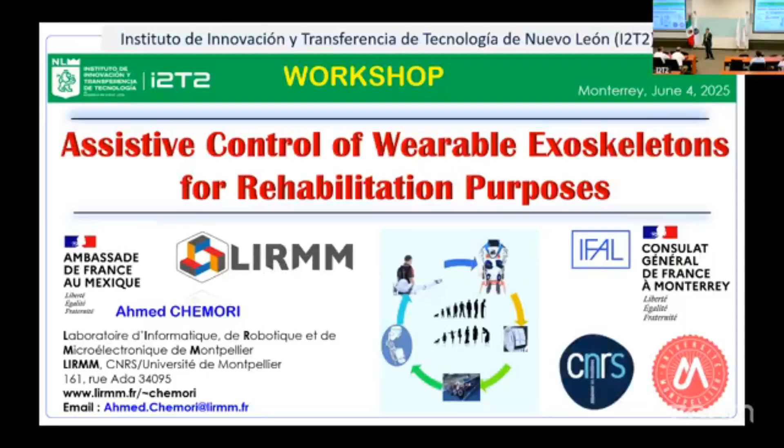First of all, before I start talking about the topic itself, let me introduce my institution. As they said, I am coming from Montpellier. Here, as you can see, this is the map of France. Montpellier is a city situated in the south of France. Very nice city, as you can see from the pictures. Here it is the center of Montpellier. And Montpellier is known by 12 things.

I will just mention 2 or 3 things. First of all, according to the statistics, we have more than 300 sunny days during each year. We have very nice beaches. It's the 8th biggest city in France with more than 300,000 people. And at our University of Montpellier, we have more than 70,000 students.

And Montpellier also, it's known by something else. We are talking about health and so on. So just to know that the first, or the oldest, faculty of medicine situated in Europe, and maybe in the world, is situated in Montpellier. It was founded around 1220. So we have a strong field in medical robotics, medical staff in Montpellier, with strong hospitals and institutions also.

I am working in a research lab called LIRMM, and LIRMM, as you can see here, this is the abbreviation, coming from Laboratory of Informatics, Robotics, and Microelectronics of Montpellier, situated in the north of the city. We have 2 buildings.

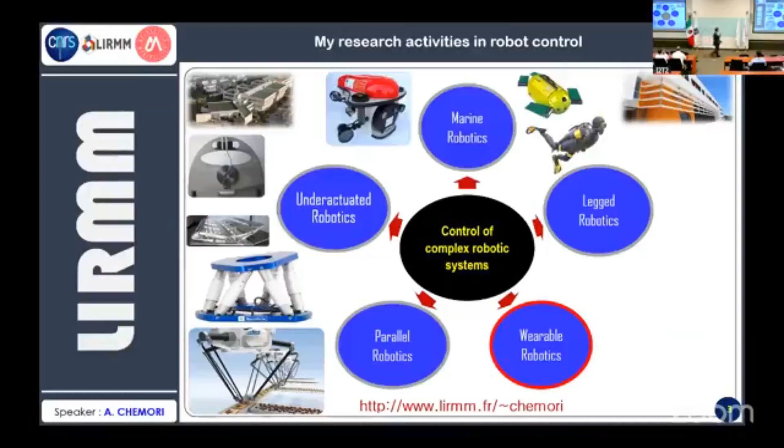The third topic concerns marine robotics, where I'm mainly interested in two kinds of underwater vehicles: classical propeller-actuated vehicles, and bio-inspired underwater vehicles. As you can see, one example is a robot actuated with fins instead of classical propellers, and we've done a lot of work on cooperation between the robot and a human diver. So that's the third one.

The fourth application concerns control of walking robots. For walking robots, I worked a lot on humanoid robots, like walking gait control. Recently I started a cooperation with Estonia, working on control of these robots in extreme conditions, such as walking outside in mud. And the last topic is the topic of today's presentation.

Then I'll show you a brief historical overview. Development of this kind of system started a very long time ago, and I'll give some examples of exoskeletons today, including some that have been commercialized in recent years.

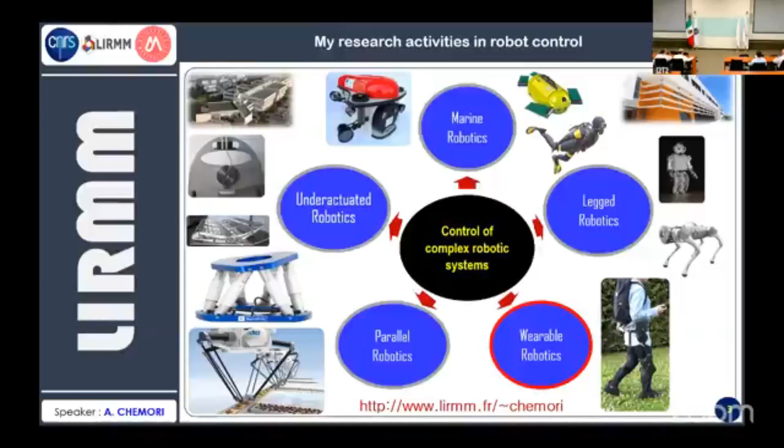For paraplegics who have experienced profound spinal cord injuries or other neurological disorders, wheelchairs may have been the best means of mobility. Now, researchers are focusing on exoskeletons, robotic ambulation devices, as a therapeutic intervention that may help some paraplegics get on their feet again.

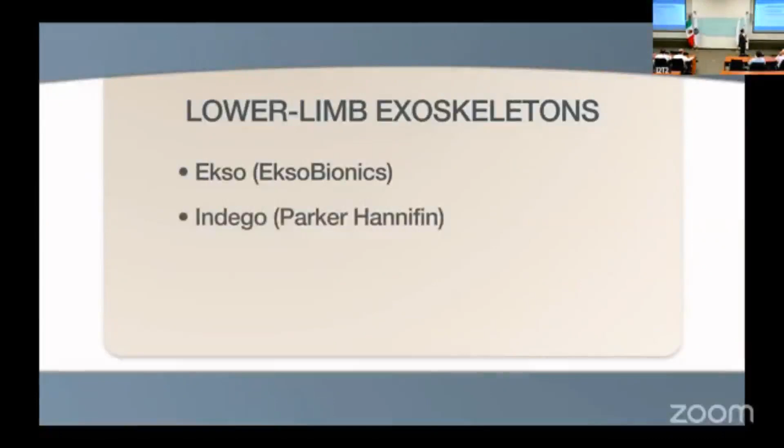Let's take a look at some of the options currently being developed. Four types of lower limb exoskeleton devices are currently being used in research and clinical trials, including the Ekso by Ekso Bionics, Indego by Parker Hannifin, Rewalk by Argo Medical, and Rex by Rex Bionics.

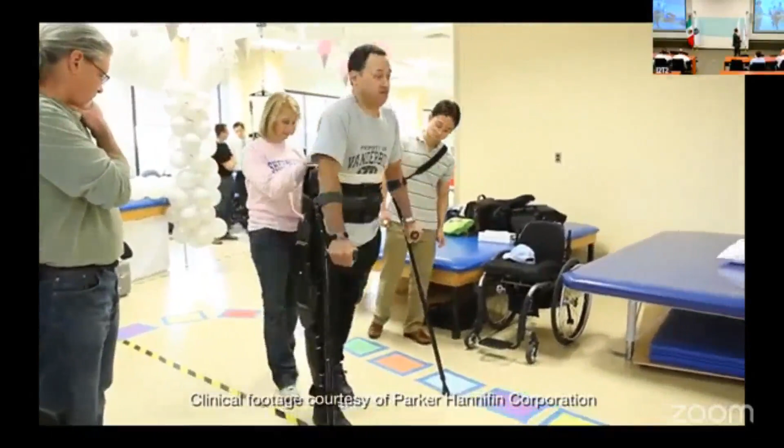These devices offer upright mobility to injured people who are unable to walk or who can walk only for limited distances. Early research suggests that these devices can contribute to reducing medical complications and improving physical strength and emotional wellness. In the meantime, it's critical for paraplegics to pursue habits that may allow them to qualify to use these devices, including maintaining a healthy weight.

While clinical trials continue, exoskeleton manufacturers are pursuing approval for private purchase of these devices in the United States.

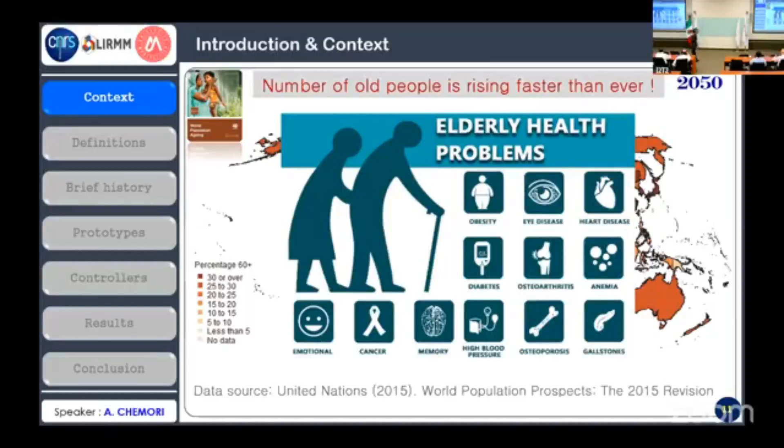And the question we can ask concerning our research topic is: what will be the solution for their mobility problems? How can we help those people in terms of mobility? Pay attention, maybe you cannot realize at what level these persons need help.

I'll give you a very simple task. If you have a human in a wheelchair, in a chair like that, and you move from seat to stand, from sitting position to standing, for us it's very easy. We don't even think about it, it's very easy.

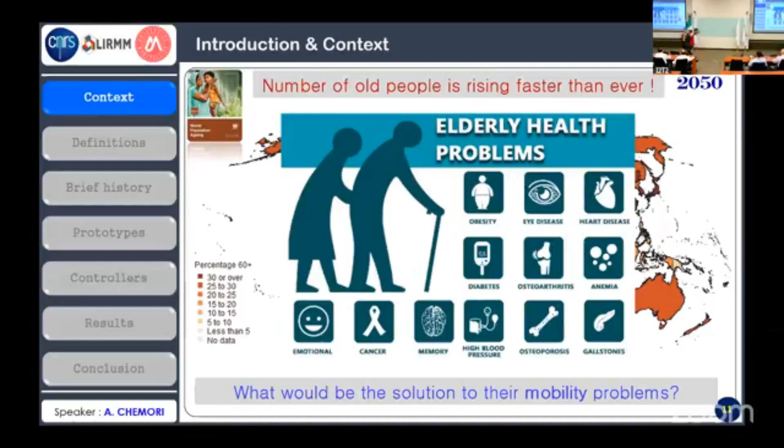But for an elderly person, this may become a challenge. Just doing this motion from seat to stand becomes really a challenge. They cannot do it, because of the weakness of the muscles in the legs. So this is a big issue.

In this case, exoskeletons may be a solution. This is why I'm talking about this topic today. Here you can see an illustration of this sit-to-stand task using an exoskeleton that can be used to help humans do this task.

Before going further and talking about my research and activities, let's go back to the basics. I don't know if everyone here is specialized in exoskeletons, but let's cover some basic definitions. The first thing to know: what is an exoskeleton? Because an exoskeleton is a robotic system used by the human, and so on. So where does this definition of an exoskeleton come from?

Before introducing the term exoskeleton, let's talk about something else. If you look at humans and animals, what we have inside our body is not an exoskeleton, it's an endoskeleton. The endoskeleton is here to protect the body and support its inner workings. We have muscles attached to the skeleton, and using the muscles you can move the different limbs of the body and do the tasks of daily life.

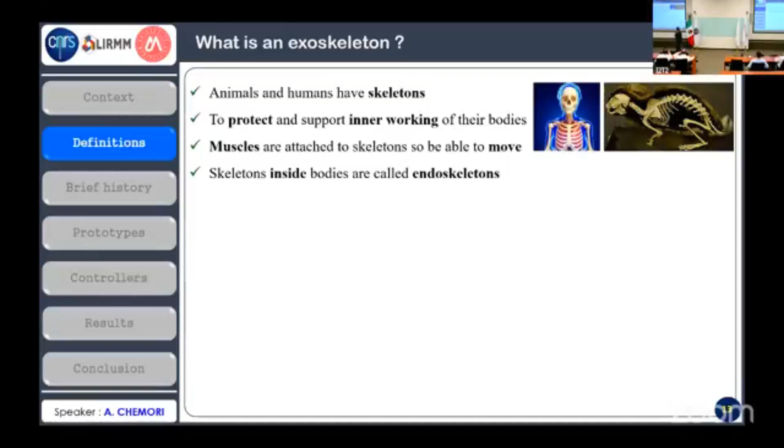Now, if we look at animals, we have something else. Animals like insects, spiders, shrimps, crabs, and so on, do not have an endoskeleton. They have something outside the body, and we call it an exoskeleton. It's used to protect their body, for instance from predators, and so on.

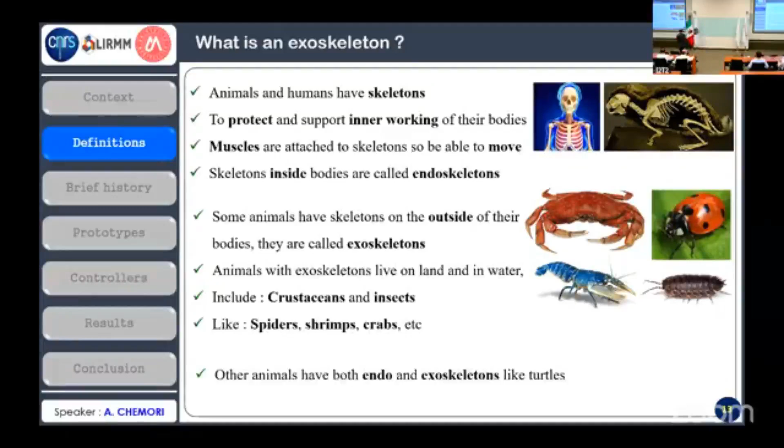And we have the exception: one animal that has both endo and exoskeleton. What do you think? Which animal can have both of them, endo and exoskeleton? Just one animal... Yes, exactly. The turtle has, as you can see, both endo and exoskeleton. So these are just basic definitions to start.

Now let's talk about an exoskeleton in terms of technological definition. So what is an exoskeleton? An exoskeleton is first a mechanical frame, designed to be worn by the human. So the human will wear the exoskeleton for a purpose. Why should the human wear the exoskeleton? It is designed around the function and shape of the human body.

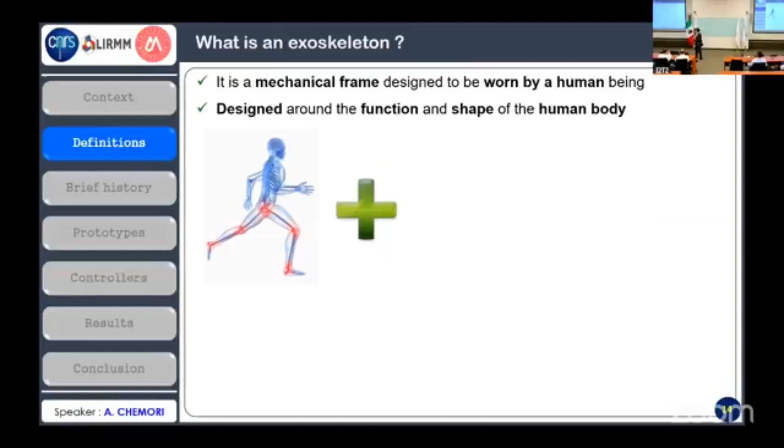Here, as you can see, you have the human body, then an exoskeleton designed to be worn by the human, and the result will be like that: a human wearing an exoskeleton. So this is the second thing to know.

Now, when the human moves, he will move with the exoskeleton. So the exoskeleton should move with the wearer, adding strength and durability. This is one of the purposes of developing exoskeletons, and this additional strength and protection benefits people in dangerous situations, like for workers in hazardous environments, or it can be used for mobility issues.

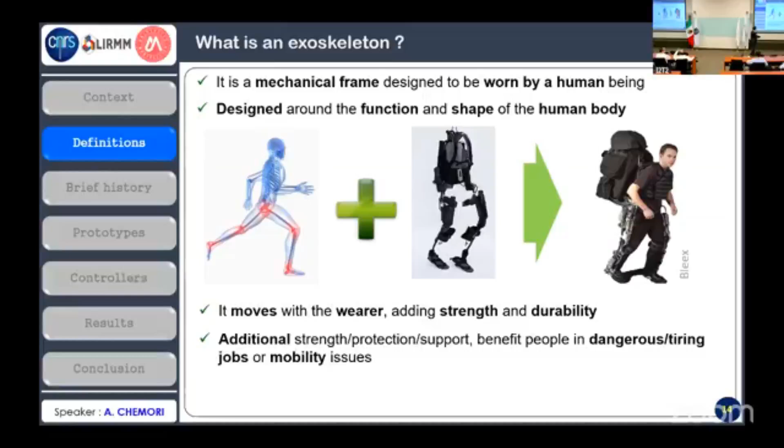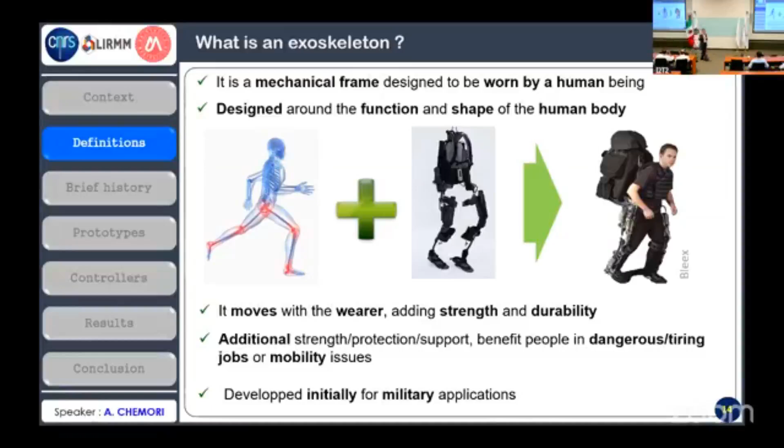So we can use exoskeletons to restore a mobility that a person does not have due to disability, for instance, or an accident or something like that. We have to say that exoskeletons have been developed initially for military applications, but nowadays we have much more civilian applications where we are using exoskeletons.

Now let's talk about the four applications, starting with the first: medical applications. If we analyze the case of disabled people, we have different types of paralysis depending on the limbs that are lost.

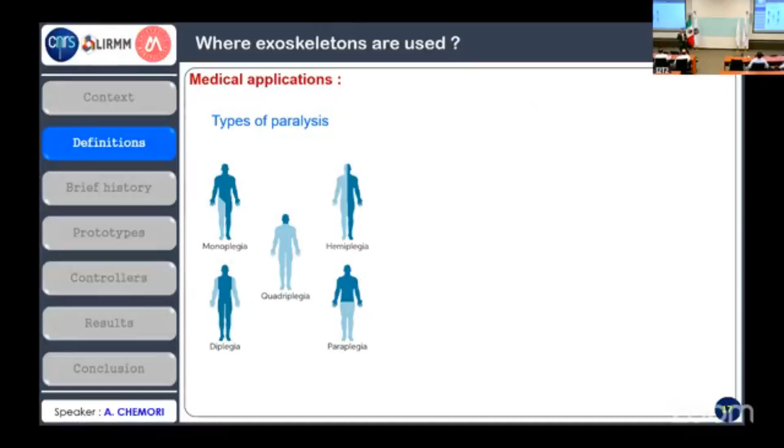It can be monoplegia, where you lose just one limb. Hemiplegia is two limbs, like lower and upper, on the right or left side. Diplegia is the two upper limbs. Paraplegia is the two lower limbs. And the most difficult one is quadriplegia or tetraplegia, where all four limbs are not working.

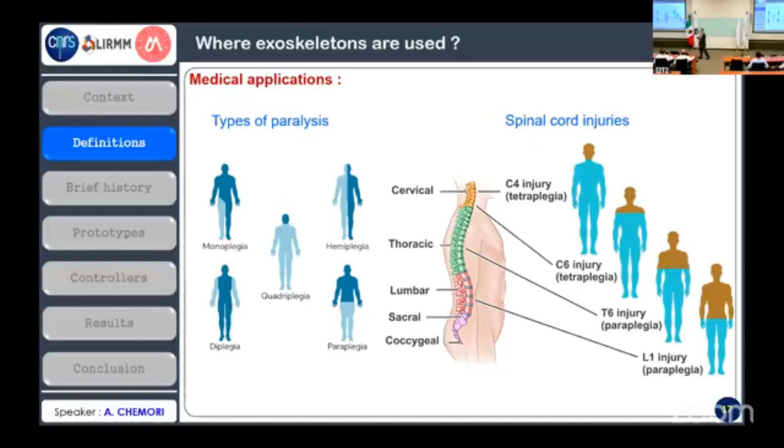This is the consequence of what we call spinal cord injury, and as you can see, it depends on where the injury happens and the resulting consequence. If it happens in the thoracic part, the consequence will be like paraplegia, for instance. This is just an illustration to show that these people need help, and exoskeletons can be used for this kind of application.

In general, for medical applications, these exoskeletons can be considered assistive devices in physical therapy. This is the main application where exoskeletons are employed, specifically for rehabilitation, and we do rehabilitation to amplify the muscles. I will explain how we can amplify the muscles using an exoskeleton.

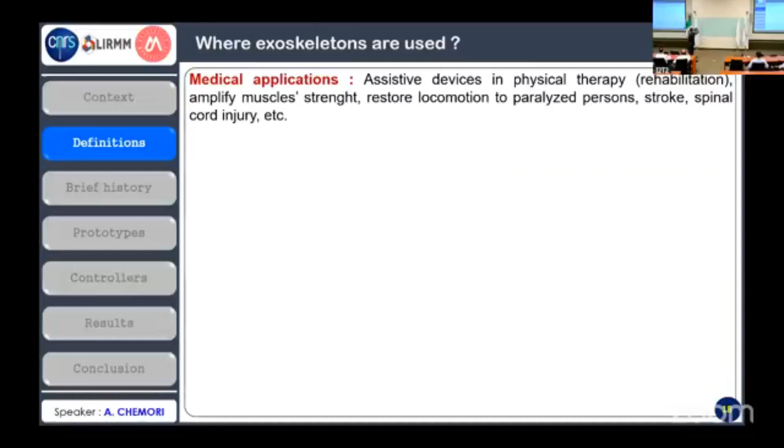They can be used to restore locomotion. So if the mobility of one limb of the body is lost, we want to restore this locomotion for disabled people, and we can use exoskeletons for different therapies like stroke, spinal cord injury, and so on.

Here we have some illustrations. We can have exoskeletons for upper limbs like here, lower limbs, something for training as you can see in this example, and sometimes for specific parts of the body, as you can see here, exoskeletons for the fingers of the hand. So this is for medical application.

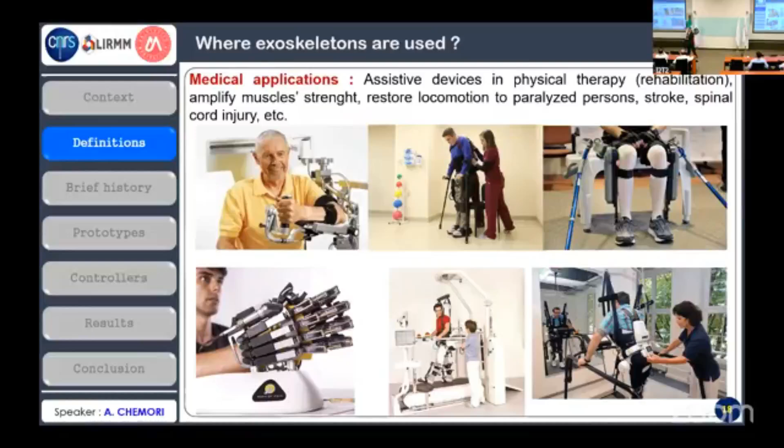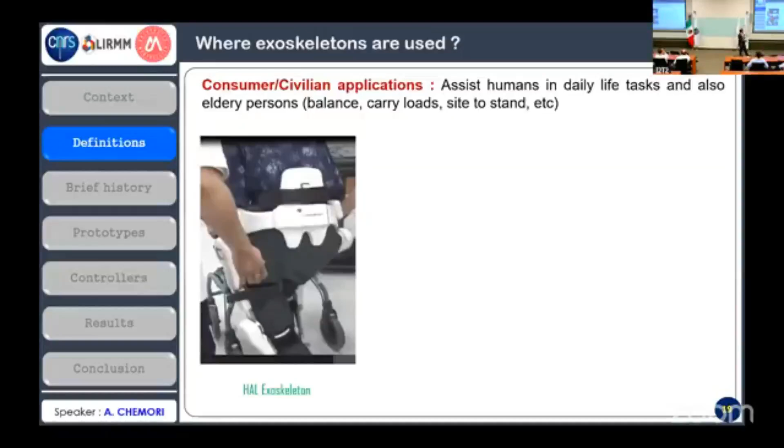Now, exoskeletons can also be good for civilian applications, and they are commercialized. Mainly for this application, they are used to assist humans in daily life tasks. As I told you, sit-to-stand for elderly persons can be very challenging for them, so exoskeletons can help them in daily life tasks and also help with balance, like carrying loads, as shown here - an exoskeleton can help the human carry these loads.

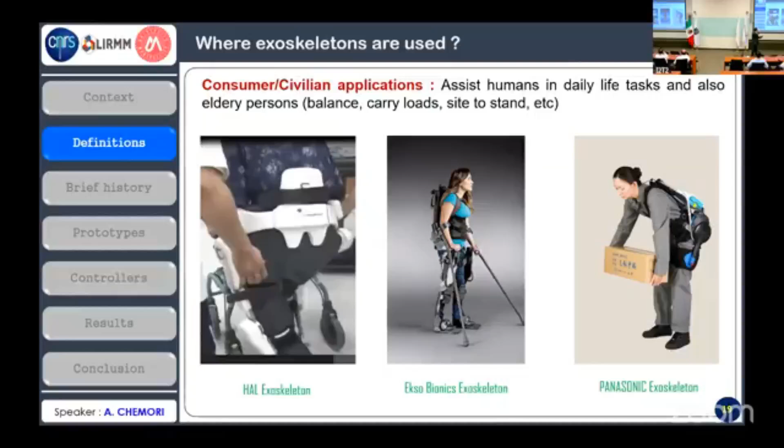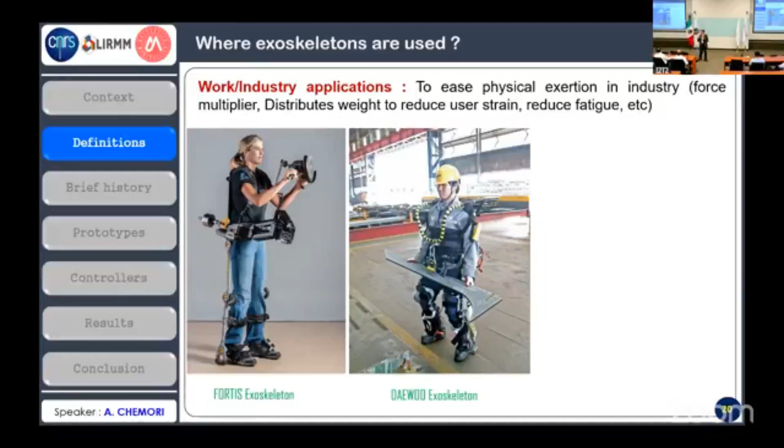Imagine a woman working with a tool that weighs 10 kilograms, and she uses the tool for 8 hours per day. This is a very big problem. So an exoskeleton can be used to hold the weight of the tool, such that the human can manipulate the tool very easily. We have other examples, as you can see here.

Here's another example, like for car manufacturers. Sometimes you don't carry a heavy tool, but you are in a very bad position all day, like that. This is not very good for the body - staying like that for 8 hours is not good. Exoskeletons may be used as a solution in this context, for instance.

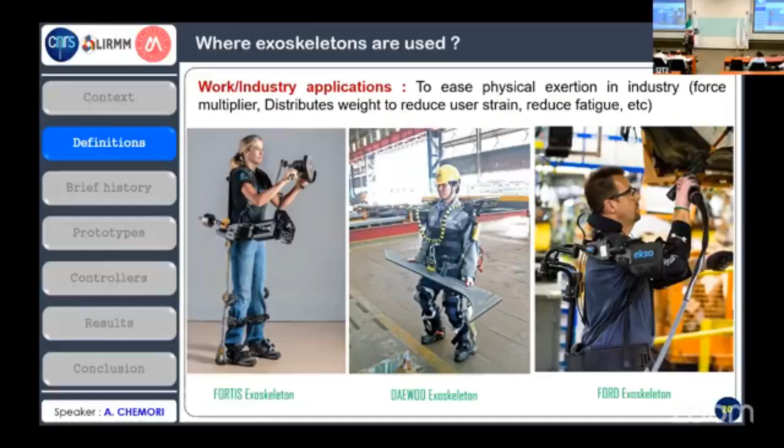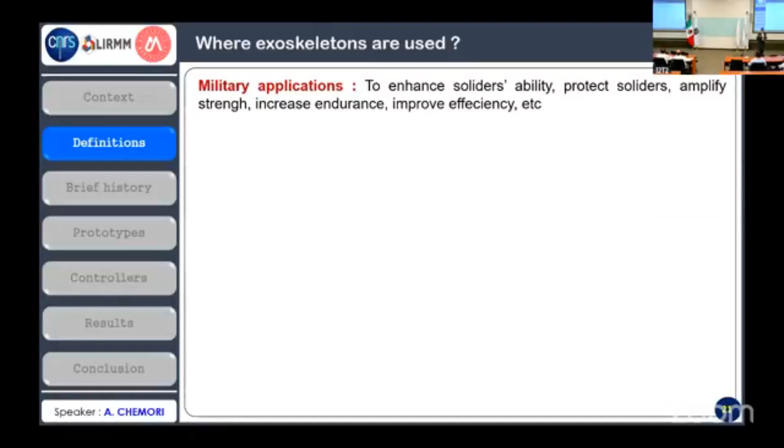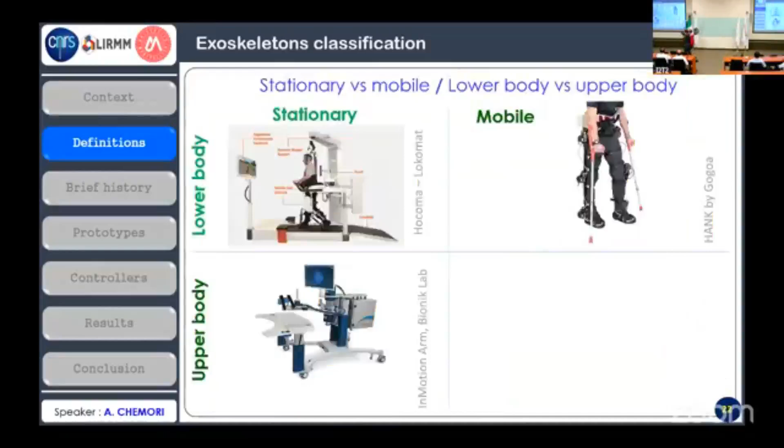Now let's do a better classification of exoskeletons. Let's give you more elements, because the previous classification is very easy - like if it is upper or lower body, and if it is static or moving.

The second thing is the structure of the exoskeleton itself. It can be a rigid exoskeleton, but nowadays we have a tendency toward another kind of exoskeleton - they are called soft exoskeletons. So they are not rigid, they are soft, and they are more and more developed in many institutions all over the world.

The second criteria is the action, because for sure we can have exoskeletons actuated with motors - they are called active exoskeletons - but we also have passive exoskeletons, so they are worn by the human, but they are not actuated.

The next criterion is the power technology, how the exoskeleton is actuated, which kind of motors or actuators are used. It can be an electric actuator motor, a hydraulic actuator, a pneumatic actuator, it can be hybrid, a mechanical system, or others. So this is the actuation of the system itself.

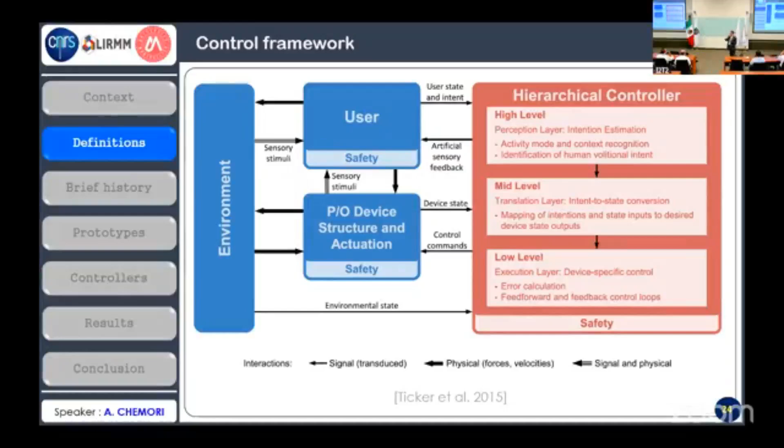I have to mention something very important here, which is different from any classical robotic system. Look here: you see the user, the exoskeleton, and the controller. Pay attention to this word: safety, safety, safety—a lot of safety. Everywhere we have to take care about safety because, as I told you, don't forget that you have a human inside the exoskeleton. So you have to pay attention.

Now let's go to the history. I like, when I do presentations, most of the time to give the history, just to know the origin of developing things. Let's start talking about the origin of exoskeletons. It's not very new—for sure they have been developed a lot in recent years, but the idea of using an exoskeleton is very old, going back to like 1890.

Then in 1965, another exoskeleton, a huge one. It weighs 680 kilograms—please keep in mind this value—and it has 30 degrees of freedom. So it's very strong, a full body hydraulically actuated exoskeleton that drastically amplifies human force.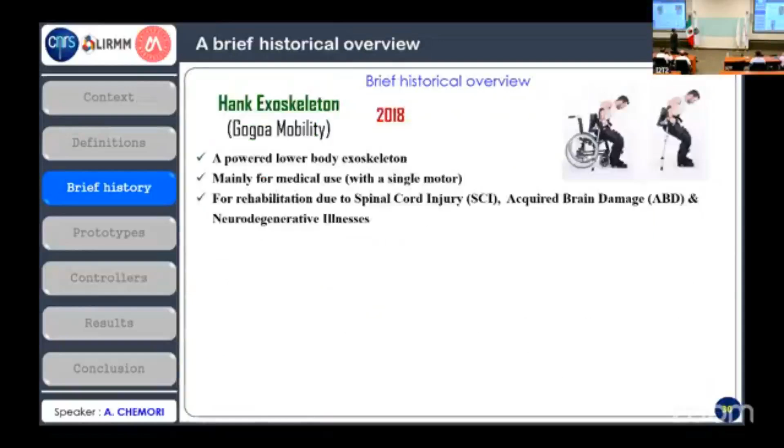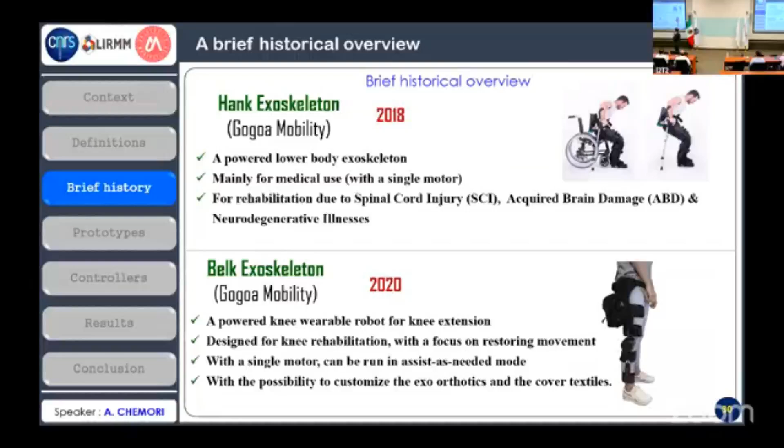2018, another exoskeleton developed in Spain by this company. As you can see, it's used also for walking, the same as the previous exoskeletons. They developed another version in 2020, and as you can see in the illustration, it's a powered knee wearable robot for knee extension, activated with a single motor. We have just one motor to activate this degree of freedom in the knee.

Now, some examples of exoskeletons of today. A lot of development we have seen, and we have a lot of examples. As I told you, exoskeleton development started in military applications and in research labs, in universities, in companies. But now we can see some exoskeletons commercialized. You can buy them. For sure, the price is still high, but we can buy exoskeletons.

We have Lokomat, used like for children rehabilitation, for training or walking, for gait training. And HAL, as I presented before, can be used for daily life tasks, like carrying heavy payloads.

The next one is for industrial applications. As I told you, might be an industrial worker working in a company doing something in this position all day. So an exoskeleton like that can be used, and it's very beneficial. It's called walking assist, or it can be used also for walking tasks.

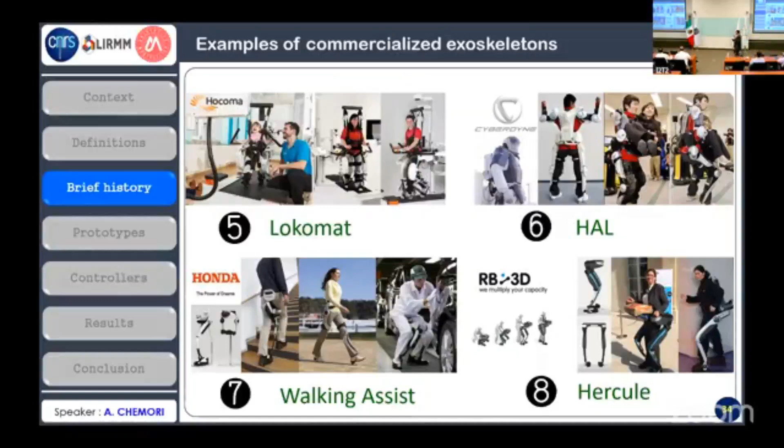After this presentation of the history, what has been done, the beginning of exoskeletons, and the exoskeletons of today, let me talk about our research. Actually, I'm working in cooperation with a university in Paris, and at that university they have exoskeletons. One of the exoskeletons we started working on was this one.

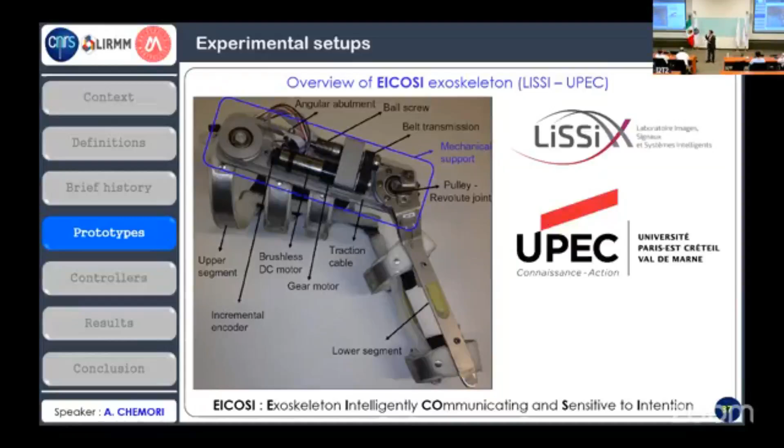As you can see, the exoskeleton itself is not very difficult. The structure is very easy because we are talking about rehabilitation of just one degree of freedom of the leg, the knee. It is developed at this research laboratory called LISSI at UPEC University in Paris, mainly developed for knee rehabilitation. The purpose of this exoskeleton is knee rehabilitation.

Now, if you want to control this exoskeleton, first you need to compute the dynamic model of the exoskeleton and the wearer. Computing the dynamic model is easy because it's just one degree of freedom, but it's difficult because, for instance, when you take into account the leg of the human, we cannot know it perfectly since it depends on the user. Sometimes you have a user with 70 kilograms of weight, or another with 45 kilograms, so they do not have the same leg, weight, inertia, and so on.

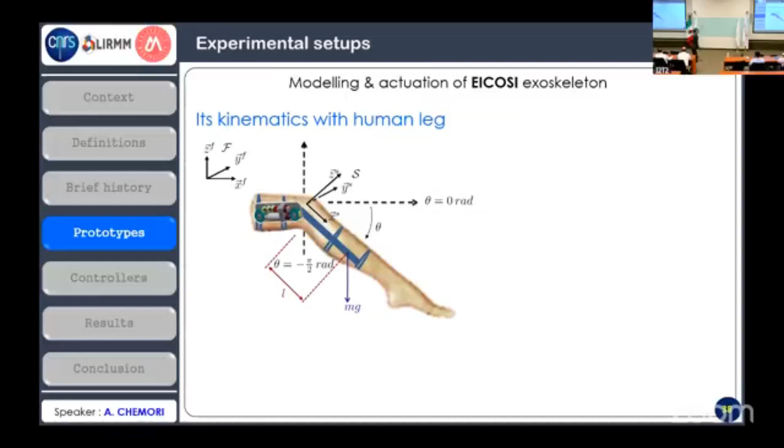So the dynamic itself is not very complex, it can be written like that. It's just one scalar differential equation. However, the big problem is knowing the different parameters of the system, including the exoskeleton and the wearer - the human and the exoskeleton together - and how we can identify those parameters.

And the other issue is this term, as you can see here, it's the torque developed by the human. The human will develop the torque. Imagine an elderly person who will use this exoskeleton - how can you measure or estimate the torque developed by the human? It's not possible. This is a big issue.

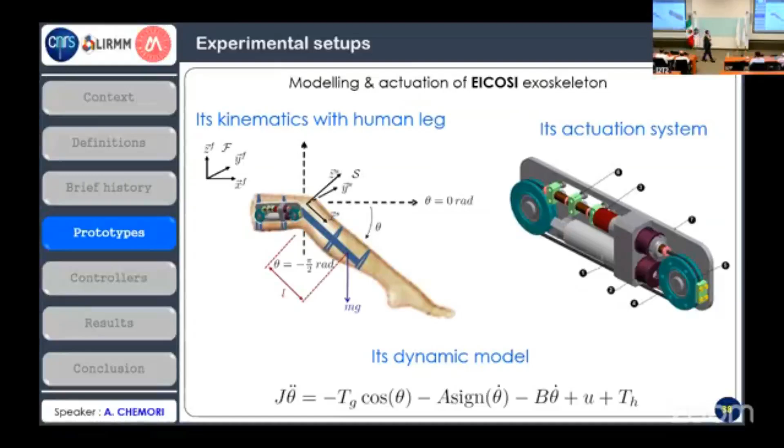Its actuation system, as you can see, it's a system with a cable, and two pulleys here, the motor is here, and it transforms the rotation of this motor to a rotation along this axis of the knee. It's mainly used for knee rehabilitation. This is just the hardware of the exoskeleton itself. We have here the control system, the power stage, the actuators and sensors used, the signal conditioning system, and this is mastered by this control system.

Another application is for rehabilitation. Imagine you have a human and you want to do rehabilitation of the leg, a flexion extension of the knee, and you repeat this motion. To repeat it, you need to wear the exoskeleton, have the human in this sitting position, and control the motion of the exoskeleton for this repetitive flexion extension motion.

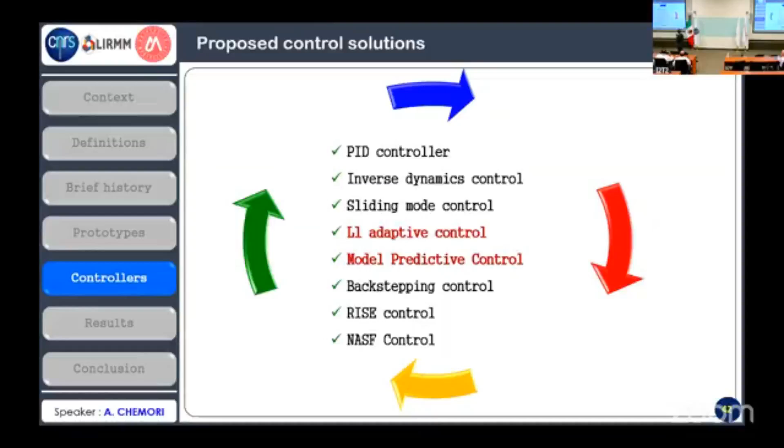Now, proposed control solutions, what we developed as controllers for this case. We developed different controllers. Here is the summary. I won't have time to detail all of them, but I'll try to detail two: the first is an L1 adaptive control, and the second is a model predictive control. Both have been validated in different situations of rehabilitation tasks.

Now let me talk about what we did as rehabilitation. We have been interested in three kinds: the first is passive rehabilitation, the second is assistive rehabilitation, and the third is assistance as needed. Let me explain all three. First, don't forget this exoskeleton has been developed for knee rehabilitation.

Let's talk about passive rehabilitation. Let me give you a complete example. Imagine a person who had an accident in football, for instance, and didn't move his leg for two months because he couldn't. What will be the consequence? After two months, what happens in the leg, and especially in the muscles?

He will lose the muscles. They will be very weak because the muscles are there to move the different parts of the leg. If you stop that, I remember a student, years ago, who didn't move his arm for maybe two months and lost the muscles of the arm. This is a big problem. So you lose muscles, and now you have to restore them.

How can you restore them? You cannot ask a human to, from the beginning, do something hard. You will destroy the muscles. What you have to do is start with something soft, something easy. So we do what we call passive rehabilitation.

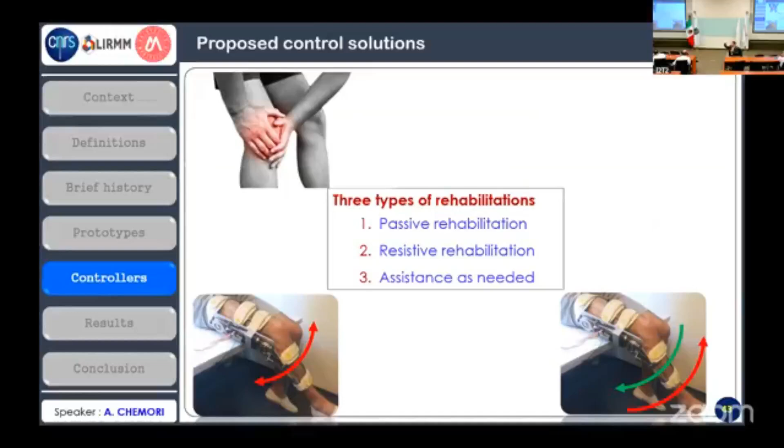The problem here is to detect the intention of the human, first, and second, to complete the torque developed by the human to reach 20 Newton meters to do this motion. This is what we call assistance as needed, and here you have an illustration of this task.

What is an L1 adaptive control? L1 adaptive control is a recently developed controller for certain purposes, compared to classical adaptive control. I will explain the reasons. We published this paper, and we developed this controller for flexion extension of the knee, as an application for knee rehabilitation, with the human in a sitting position like that.

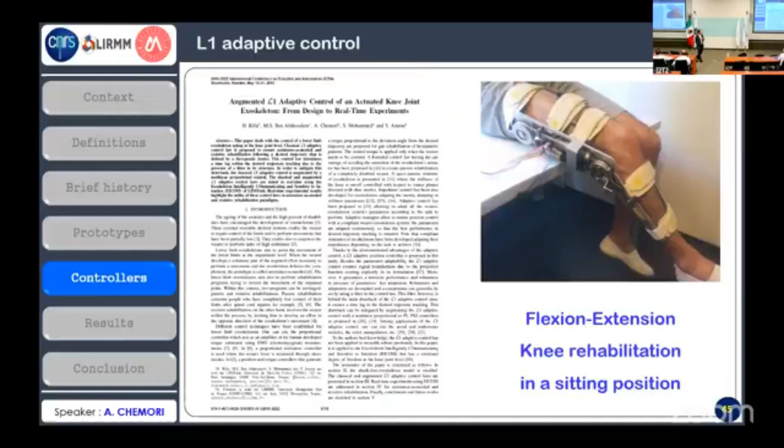Let me tell you more about L1 adaptive control. This is more theoretical—I will try to go quickly, but I will also try to explain the concept, because the concept itself is good to understand. Why L1 adaptive control? I think everyone here knows what L1 is, and what adaptive control is in general.

You know PID control—it has three gains. I don't know if you can write. Is this a table? Can we write on it? No. What? I don't know.

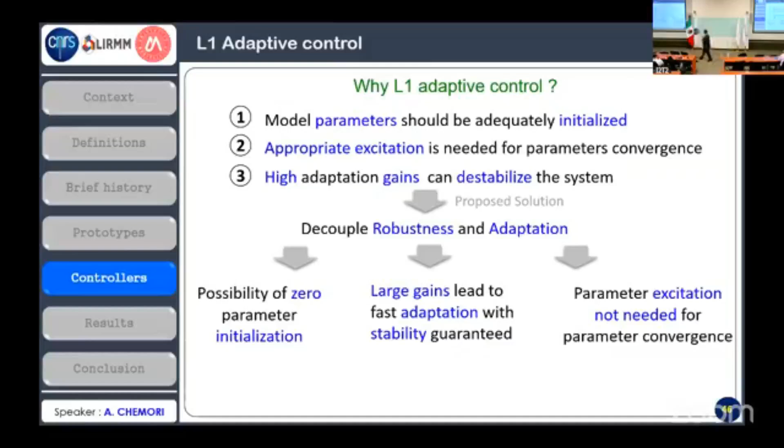All these aspects we can find in the concept of L1 adaptive control, developed around 2010, and briefly, the concept was applied a lot for aerial systems, aerospace.

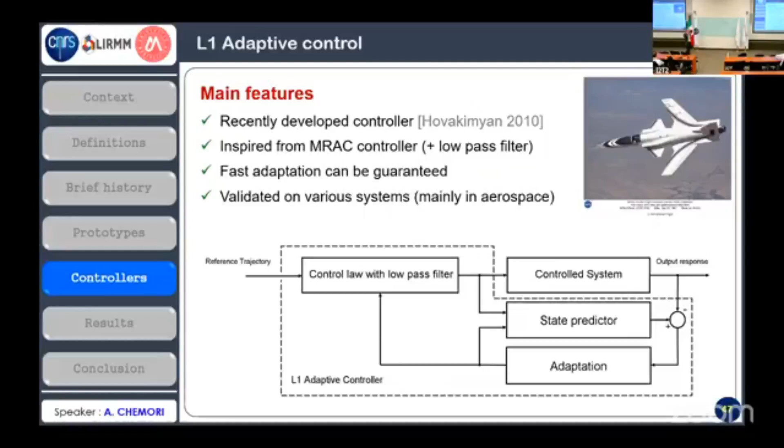And the concept is here: we have the controlled system, we have the state predictor, we have the adaptation mechanism, and the key development part of the controller is a low pass filter. When you introduce this low pass filter, you can increase the gain, no problem, you will not have instability.

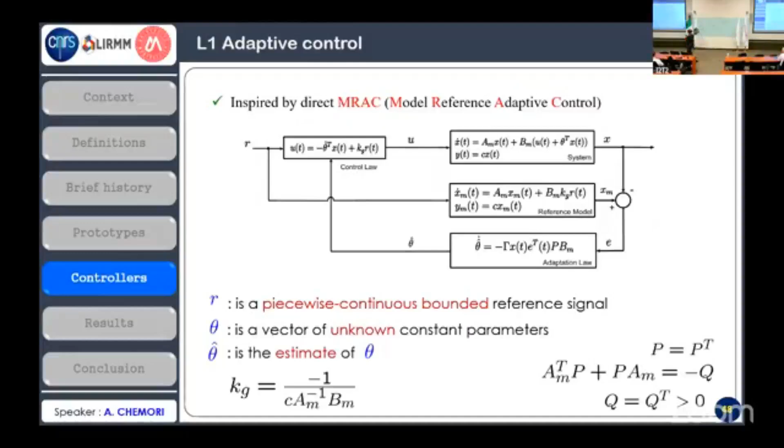Basic principle going from model reference adaptive control to L1 adaptive control: first stage, you have to replace the reference model. Here, reference model, you have to replace it by a state predictor. Second stage is to add this low pass filter, as you can see here, to filter the control input. And the last stage is to limit the estimated parameters.

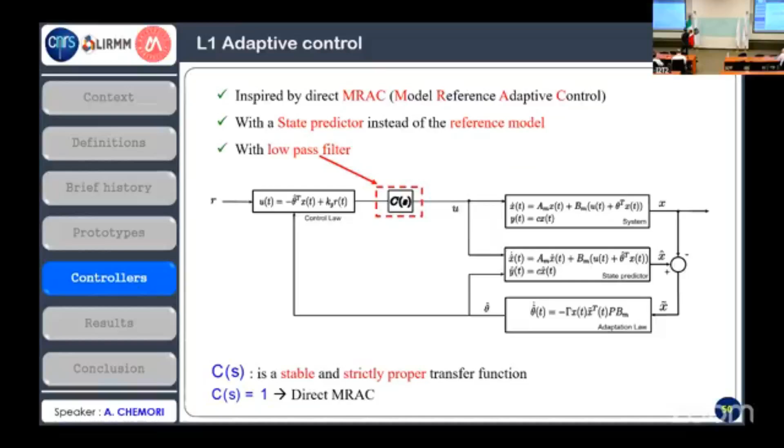Because when you estimate, how can you guarantee that the estimation will not go to infinity? So you need to guarantee the boundedness of the estimated parameters, and in this case you just add this projection, added in the control system here. Yes, here you have projection to limit the estimated parameters. This is the same block diagram for multi-variable, multi-input, multi-output systems.

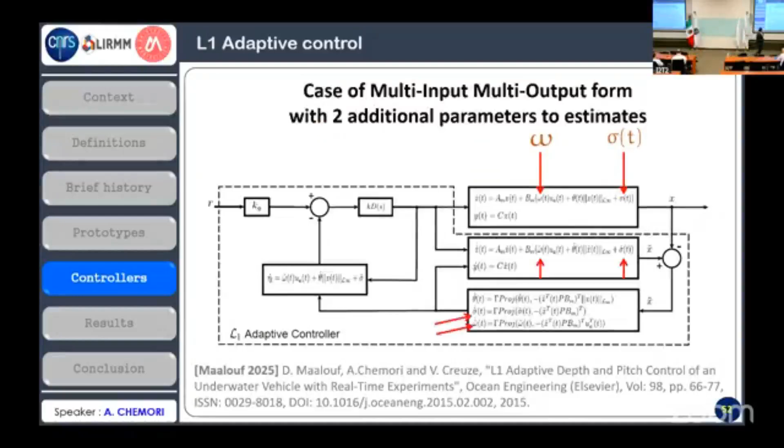Here we have a small problem with L1 adaptive control. Since you have a filter, and also the same for model reference adaptive control, if you have a fixed reference like that, you can converge perfectly. But if you have a time-varying reference, you will have a problem of time lag limitation. This is a limitation for L1 adaptive control and also for model reference adaptive control.

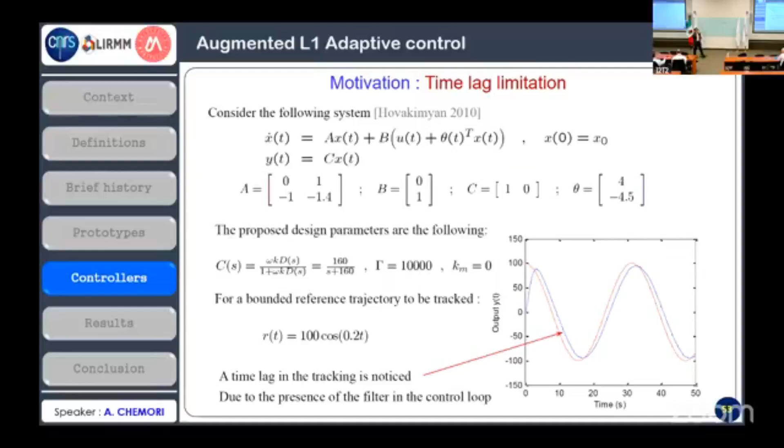So the solution we propose is just to add an external control loop based on a PID, for instance, and you combine this with the L1 adaptive controller to resolve this problem. And the result will be here, as you can see.

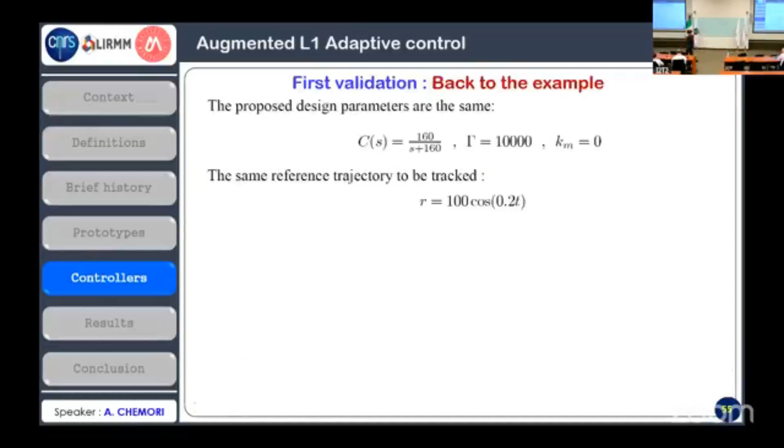If we go back to the example, this is the result. As you can see, the red curve is the desired, the blue is the previous case for the L1 adaptive control, and the gray one is the proposed controller - an extended L1 adaptive controller - and we reduce this problem of time lag that we have in the system.

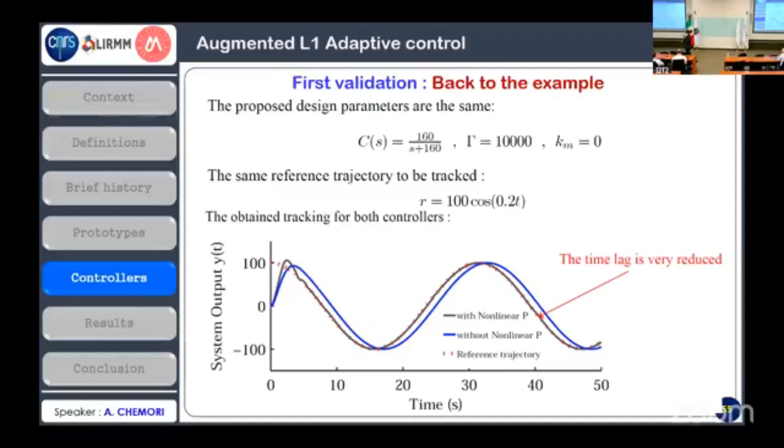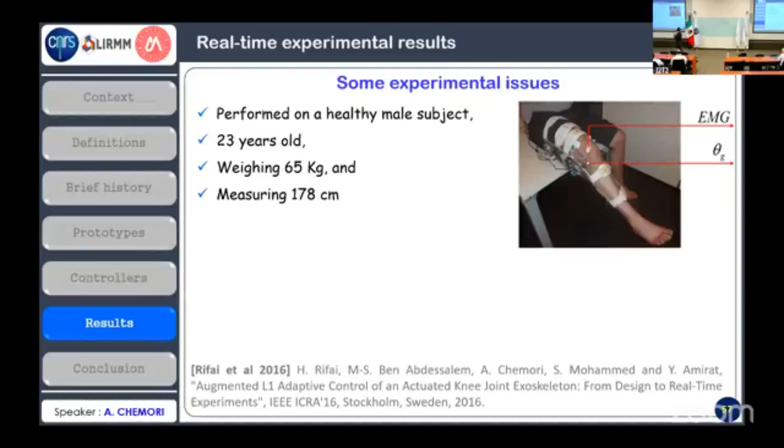Now, experimental results. We implemented this controller on our exoskeleton, and let me show you some experimental results. We did experimental results on a healthy person, 65 kilograms weight, 1 meter 78 centimeters, and we did different scenarios. We employ EMG signals to measure the activity of the muscles of the leg of the human.

We have a scenario of passive rehabilitation, where the human will not develop any torque, any effort, and the exoskeleton will do this. The second scenario is assistance as needed, here to help the human. And the third is resistive rehabilitation. In the following, I will show you just the two scenarios: assistance as needed and resistive rehabilitation.

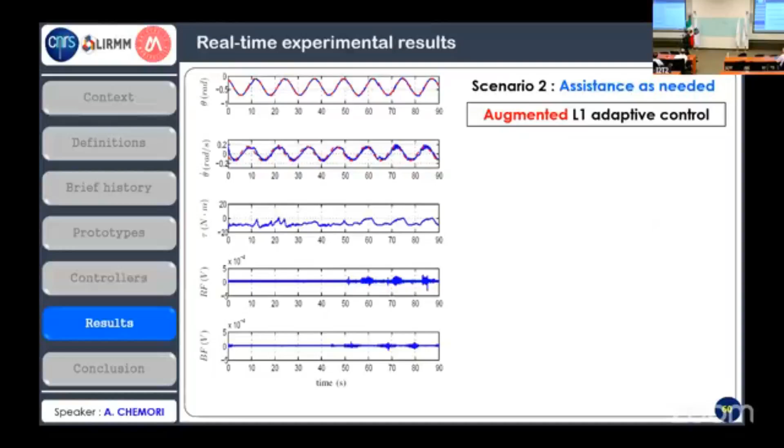Then we tried our proposed controller, the extended adaptive controller, and you have the performance here. As you can see, it's much better. The tracking, we can distinguish passive and active rehabilitation. We can see that there is no time lag. We can see the flexion extension through the measurement of the signals from the EMG sensors, and we can see the estimated parameters without any discontinuity in the parameters information.

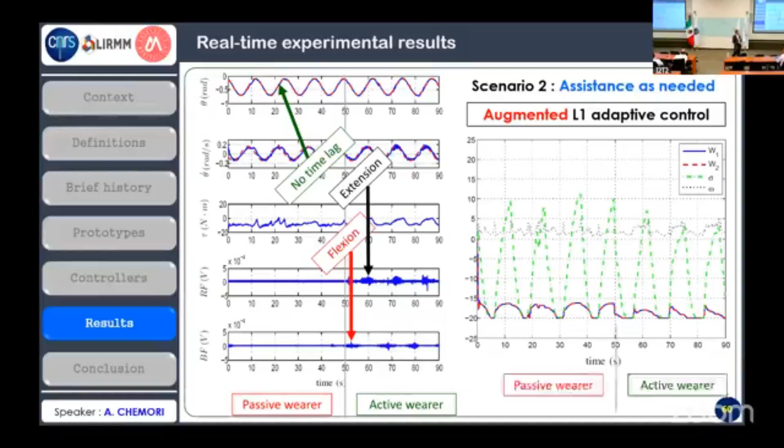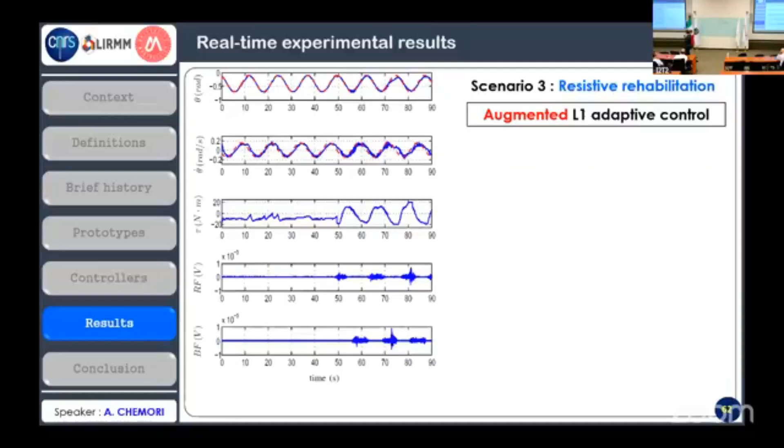So we try to implement our controller also for this scenario, the augmented or extended adaptive controller. And as you can see, the performance is much better. The same, you can see the different phases, passive and active here, estimated parameters, and also there is less oscillations in this case.

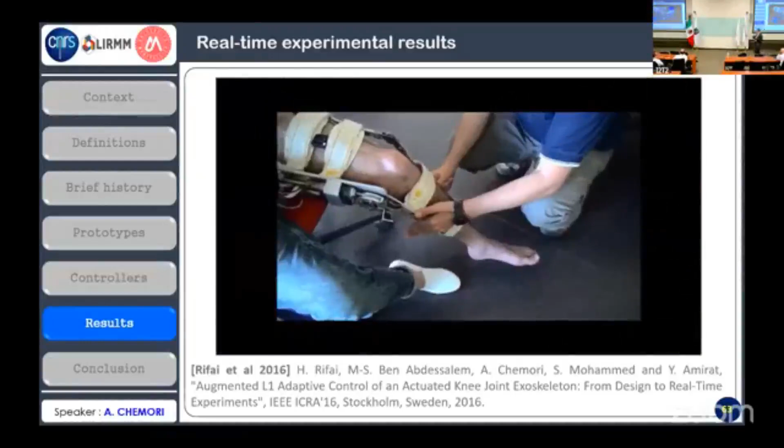I have a short video that shows you the obtained experimental result for flexion extension of the knee. By doing experiments on healthy people, it was the student himself who did the experiment by himself, so he wore the exoskeleton and tried the proposed controller. Here we try to lock the knee first and then we release it to go to the desired position, and we repeat this motion by the human.

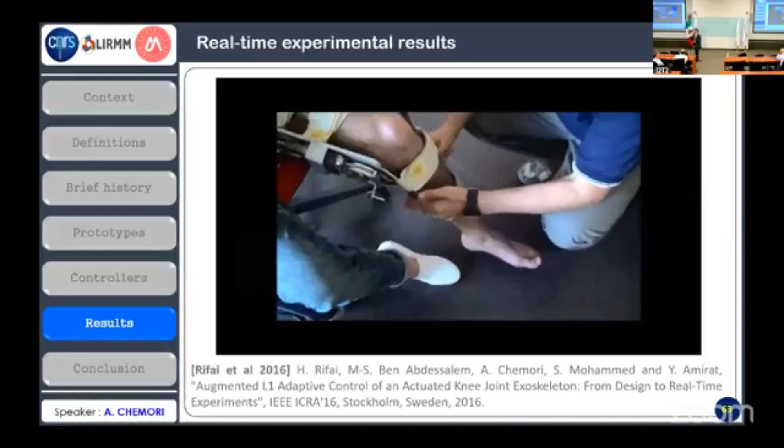The details of this developed controller can be found in this conference paper. I will show you by the end of the lecture where you can download our papers already published, and you can see the results or more details about the controller and the results in the paper.

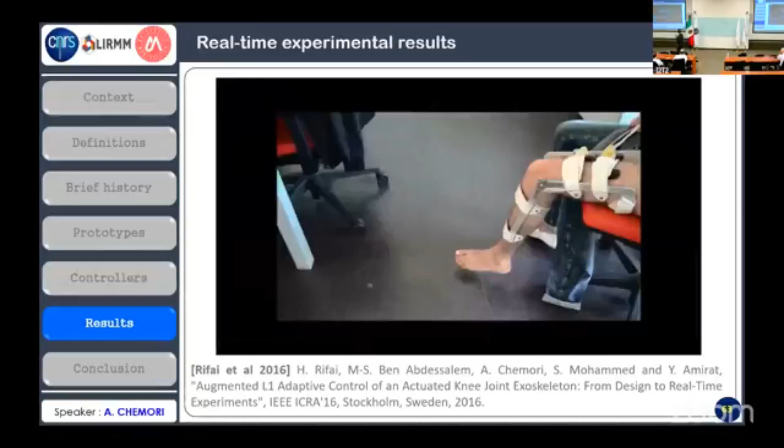The second scenario here is a flexion extension. So we go from this position to this position, we repeat this motion. It's a square signal like that. It means when we arrive, we stay here because it's like that. Then we move to the other position, we stay, and so on. We repeat the same motion.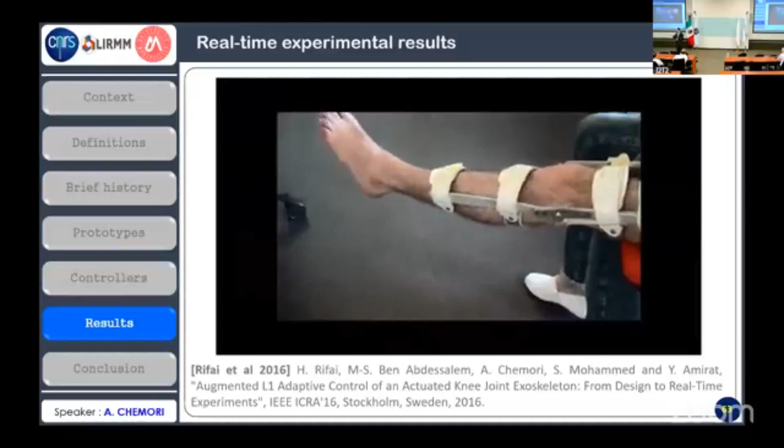This is the second scenario. And the third scenario that we will see in the following sequence, here it's a continuous signal. It's a sinusoidal tracking signal. It moves from flexion to extension, we repeat the motion. And this is the obtained performance.

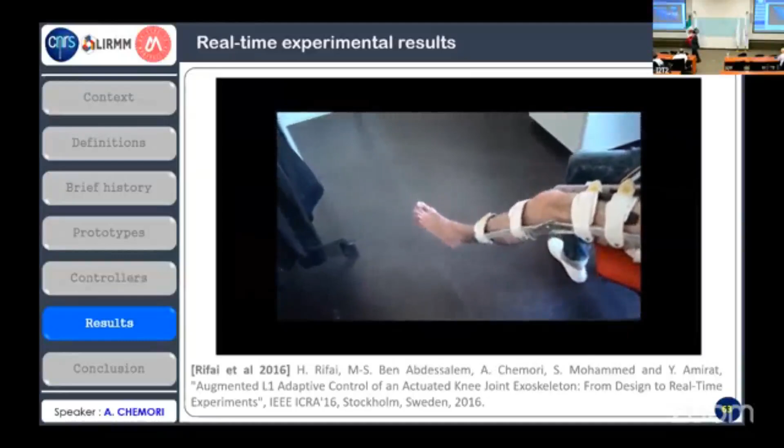So this is the first controller. Let me now go to the second controller, MPC or Model Predictive Control. And for this controller we developed, it was published in this paper. You can find the details in the paper also.

The idea here, it was not a flexion extension for sitting position, it was for walking rehabilitation. And we were interested in a scenario for persons who have abnormal walking. What is an abnormal walking? It's not a normal walking.

It means that we have two parts, the right and the left one, and the human walks like that. So this part is normal, but this is not normal. So walking in this way, this is the idea. And we want the human to wear the exoskeleton on this leg and do the rehabilitation to reproduce the normal walk. This is the idea. This is the trajectories of the knee for walking, normal and abnormal. As you can see, the normal one should be like that.

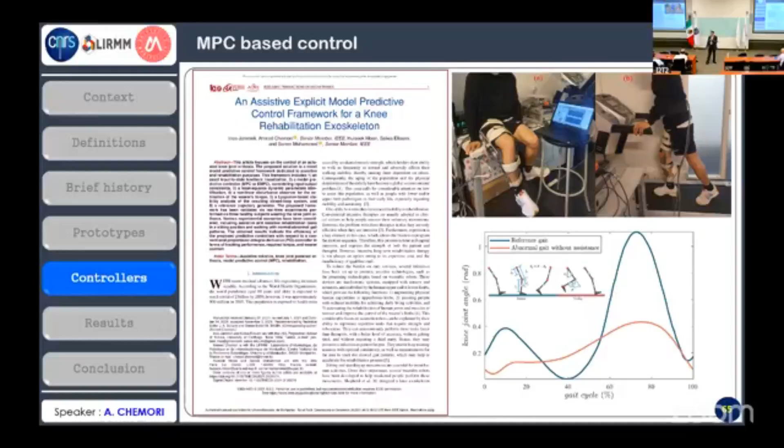And this is the red one, which is abnormal. So when he walks like that, you don't move this leg correctly. This is when you have less amplitude in the signal.

The default controller is summarized here. I will not go through the details, I will just summarize. In this case we have the environment, the wearer, and the exoskeleton. In green are the parts of our development platform. We have here an estimation of the parameters. As I told you, pay attention, we need to estimate the parameters of the leg of the human and the exoskeleton, both. This is done here in estimated parameters.

We have a first closed loop controller, a nonlinear state feedback controller. Then we have another predictive controller in cascade, the second controller. We have here a nonlinear disturbance observer. And you know why we developed this? We developed a nonlinear disturbance observer for the estimation of the human torque. I told you we cannot measure this torque, so we estimate it using a nonlinear disturbance observer. And here, as you can see, is the estimated value of this torque.

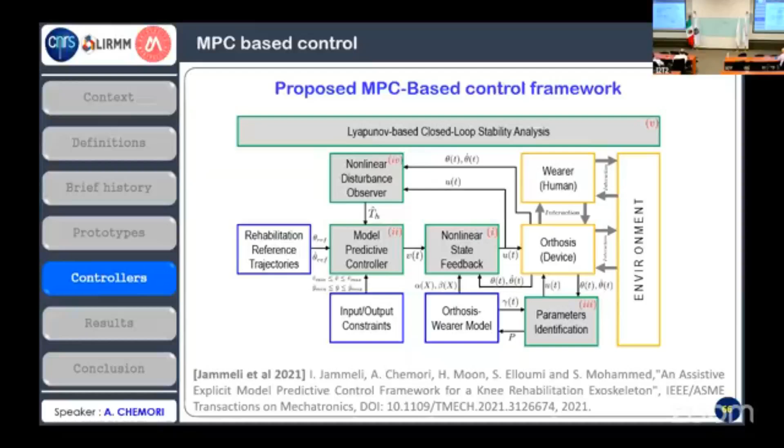The last part, on top, represents the stability of the closed loop system using Lyapunov arguments. In the following are the equations and so on. I think I will skip this, unless you want to see it. It's just the details of the controller.

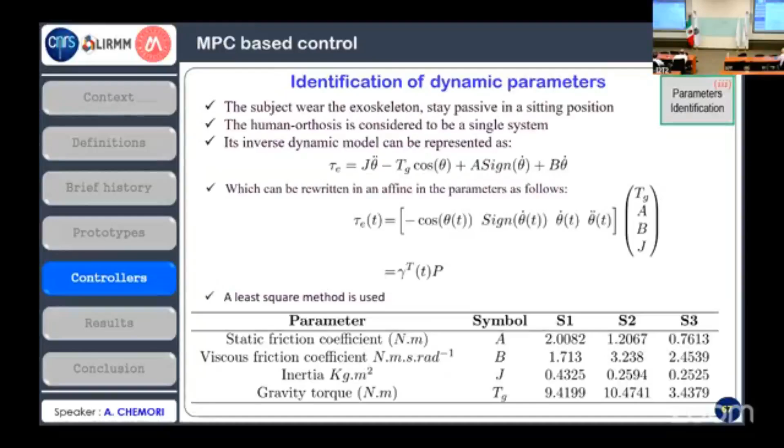This is the identification of the parameters, and these are the values of the estimated parameters on 3 subjects. Then we developed our input to state feedback linearization, a nonlinear controller like that. This is the second part. Then we develop...

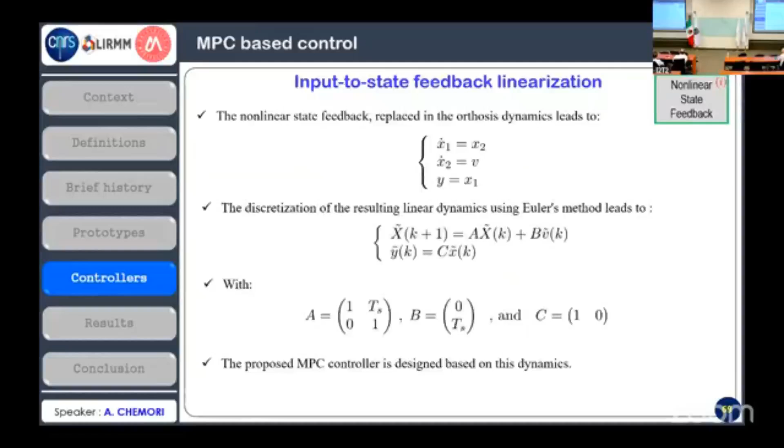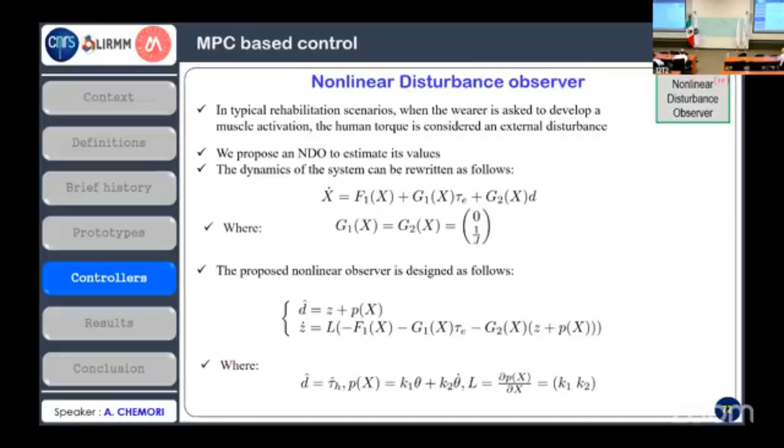Experimental results to finish. We have a short video that shows you the obtained results and compares the proposed controller, which is an explicit model predictive controller, with the PID and the classical model predictive controller. It's just a short video talking about this abnormal walking. So as I told you, he's talking about this.

We were interested in doing rehabilitation for a person who has this problem. The only thing is we didn't do the experiment on a real patient, it was on a healthy human, because it was so difficult to get the opportunity to do experiments on real patients. I will explain why. Here are the results: the PID, as you can see, the tracking is not so good.

Model predictive controller MPC is better than PID, but the best one is here, the explicit model predictive control. As you can see, the human is walking on a treadmill using the exoskeleton for rehabilitation of the knee. Here you can see the signals measured by EMG sensors, and here is just the verification of the power of the motor used in the exoskeleton, just to quantify the energy used for this rehabilitation.

That's it, let me conclude my presentation and arrive at the end. The topic of today's presentation was about the control of wearable robotic systems, or exoskeletons. The idea is to learn about those systems which are used for a lot of applications, mainly 4: military applications, medical applications, industrial applications, and civil applications.

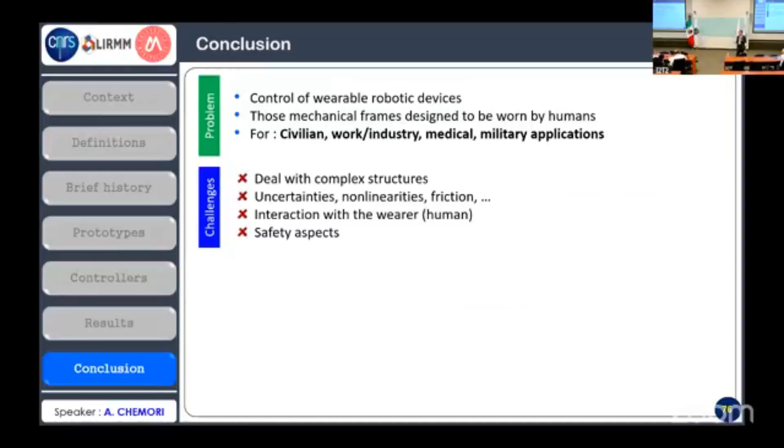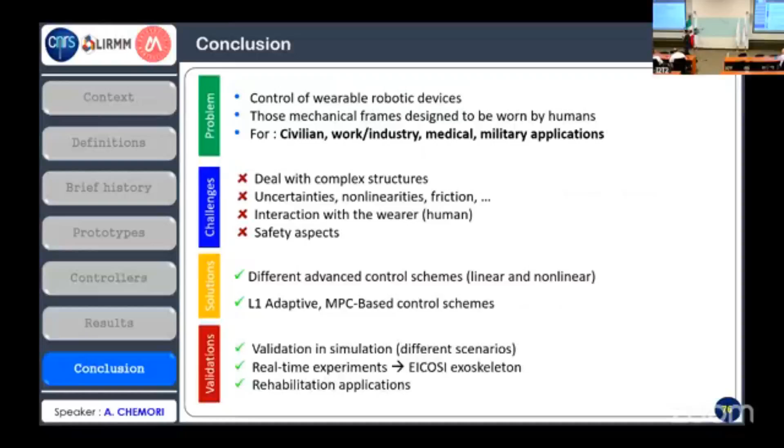In our case, to develop controllers for these kinds of robotic systems, we faced a lot of challenges because, as I told you, the dynamic model of the human leg cannot be fully known. The parameters may change, it has highly nonlinear dynamics, and there is interaction between the human and the exoskeleton, plus safety problems we need to take into account. We prepared control solutions; I tried to introduce 2 of them, the nonlinear control and the model predictive control, and I showed you some experimental results validating the proposed control solutions.

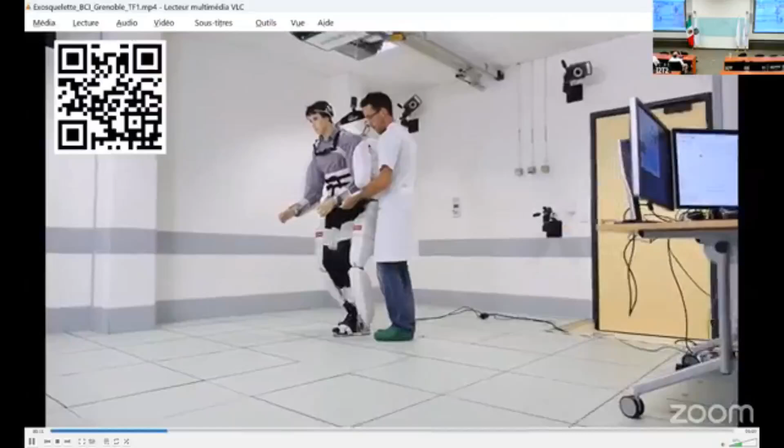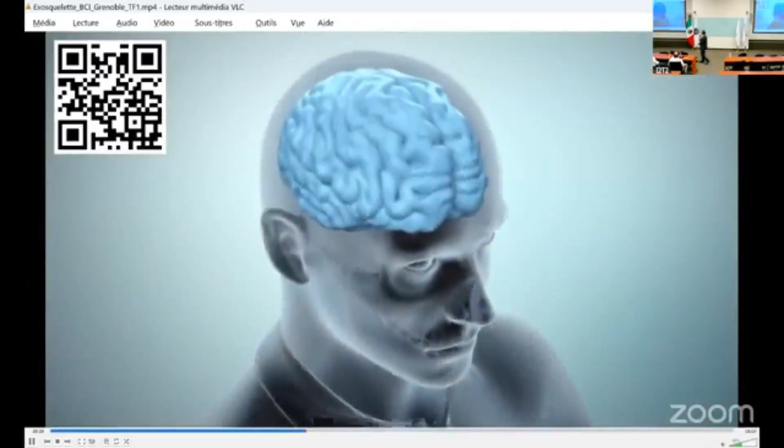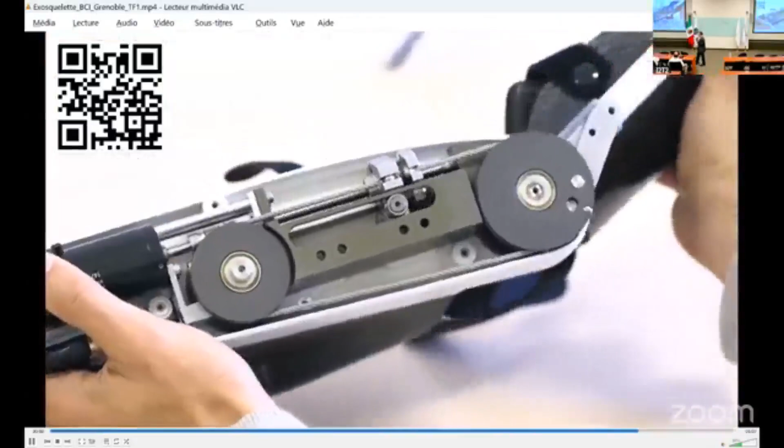Yes, just to answer the question, so this is the work of a company in France called Clinatec, and they are developing this solution that we are talking about. So this is the exoskeleton. They developed this exoskeleton, and here they developed the control system based on EEG signals. They analyze the activity of the brain, and they developed a small device that can be fixed on the head of this person. They measure this activity and connect it to the exoskeleton here. As you can see, the information is sent to the control system and so on, and they are moving the exoskeleton. This is the real exoskeleton, as you can see. But in our case, we didn't use this yet. This is the controller, the transformation of the solution, it's also the same as we are doing.